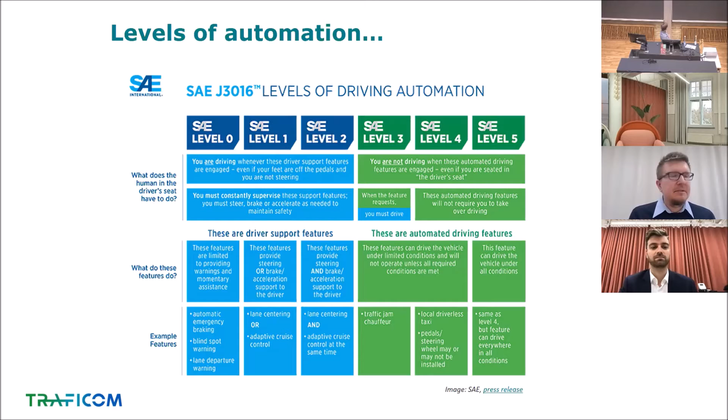A couple of words on the levels of automation. The typically used terminology talks about SAE levels of automation, from 0 to 5. One note: level 3 automation is something where the driver is still expected to act as the backup to the vehicle. When you talk about urban applications, you typically talk about level 4 type of things, when you talk about shuttles, or maybe other things.

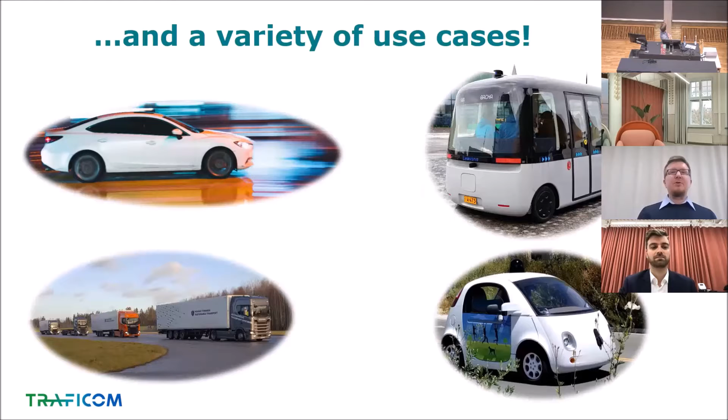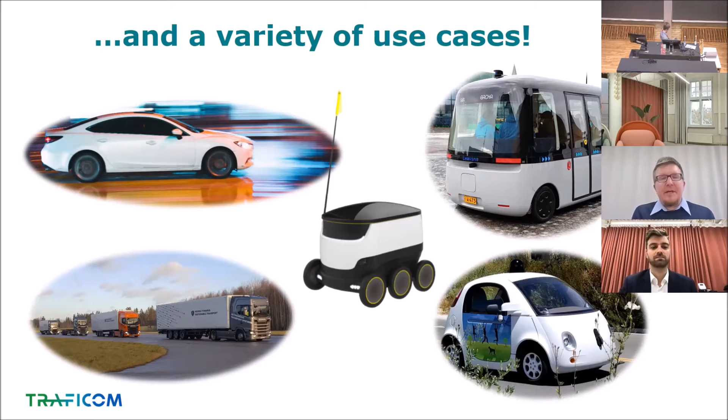I'll probably skip this one, but I'll go to the use cases. When we talk about urban applications for automated driving, you have different types of shuttles, then an aim towards a robotaxi type of service, and new additions like small sized delivery vehicles used to deliver goods and packages. The applications for these types of vehicles are still being tried out, and it remains to be seen how and when they will be used.

If you want to know where we are on automated driving on the technology front, just last week Waymo, the company considered to be at the top of technological development on automation, especially for robotaxi type service in a specific area, opened up their driverless taxi service, using regular cars fitted with Waymo technology, now opened to the general public in one area of Phoenix.

In Phoenix, Waymo has been testing for 4 or 5 years with a closed test going on there, driving tens of millions of miles in different parts of the United States, acquiring experience for their product and technology, and now they're ready to open it up to the general public in the Chandler suburb.

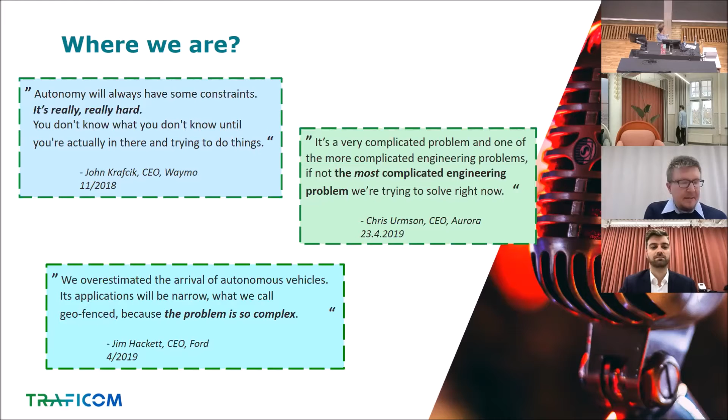Ford, also among the leaders, talks about how earlier there was an overestimation of how quickly autonomous vehicles would arrive. In limited, geofenced settings, you can address the issue because the problem is complex. One of the leaders, now at another company, talks about automated driving being one of the most complicated engineering problems being solved right now, and I think this is quite fitting for where the development is.

So why is it difficult?

Because it's about a vehicle that moves among regular traffic, among people, bikes, other vehicles, for full automation it would need to be able to do all the things that a human driver does when making decisions when moving a vehicle in traffic. So it needs to sense, then it needs to think about what the situation is, what is around the vehicle.

You need to do this very accurately to have a good picture of the surroundings. Then the vehicle and the system needs to be able to predict what each object around it will do next, and then it needs to plan what the vehicle needs to do itself. So do I continue on this path? Do I slow down? Do I accelerate? Do I turn a bit left, or do I turn a bit right?

And it needs to do this constantly, every tenths, hundredths of a second. And this is repeated, and this maybe paints the picture. That's the middle part - thinking, predicting, planning - that's done via software and different types of artificial intelligence or machine learning applications, if you talk about image recognition, for example.

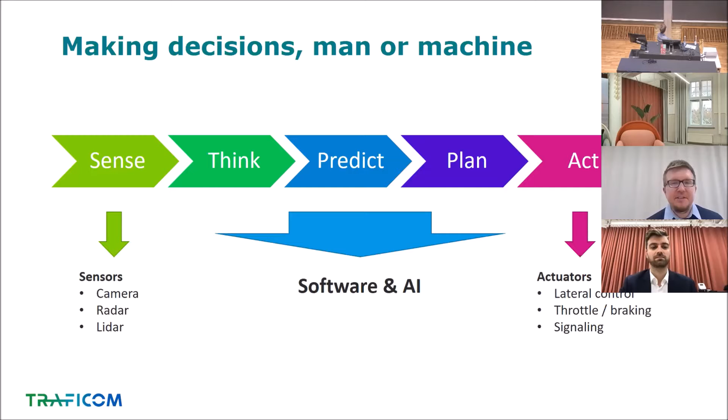And then they need to classify them, and then they need to predict what they'll do. So are they people, are they something that should be avoided, or is it something that you can just kind of go on? And the information you get from cameras, other sensors, it's never complete. The quality of the data is something, and it's not 100% at any time. And when you combine data that's of different quality, if you just look at it from a statistical point of view, you know that the sum of the parts is even more inaccurate than the original data.

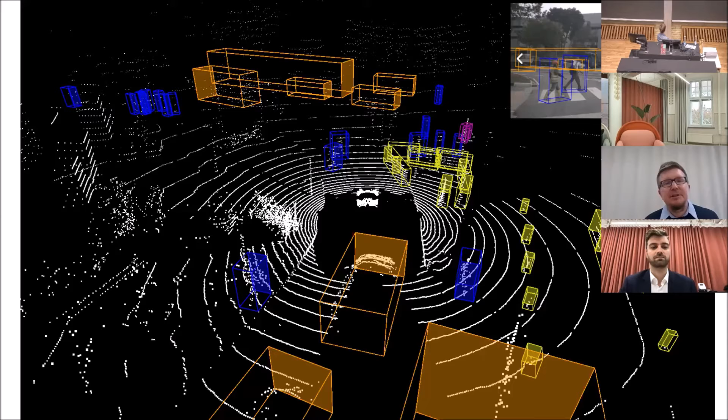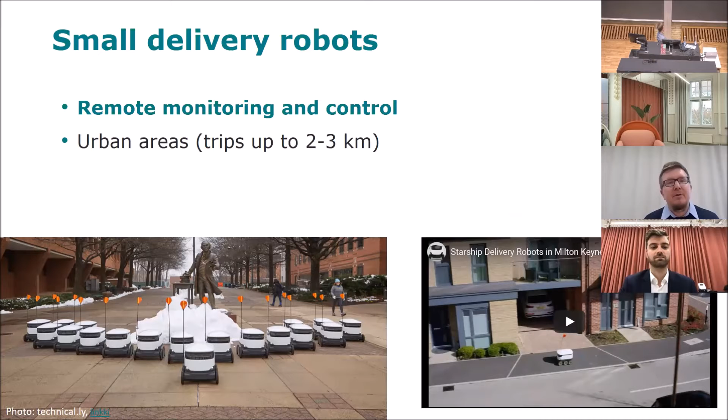Okay, but what's coming up or being tested? I mentioned the small delivery robots that are pictured here, where the use case is that you could use it in an urban setting for short trips, maybe a kilometer, 2, 3 - not maybe in a huge metropolis, but in a semi-urban, suburban area, or then a quieter urban environment.

And in general, different types of remote monitoring solutions, whether it's the shuttles that have been tested in Finland and around the world for transporting people, whether it's goods delivery on a small scale, medium scale, or the full truck size scale that Einride is trying to do and accomplish. But the basic solution here is an automated vehicle and then remote monitoring for it.

So in problematic situations, there's a control center that can intervene and give guidance to the vehicle - not so much as having active remote control, so someone constantly driving the vehicle remotely. This is not something that's currently seen as really that feasible. So the vehicle will have to be able to navigate on its own and get along on its own for the most part, and then in problematic situations, the control center could intervene.

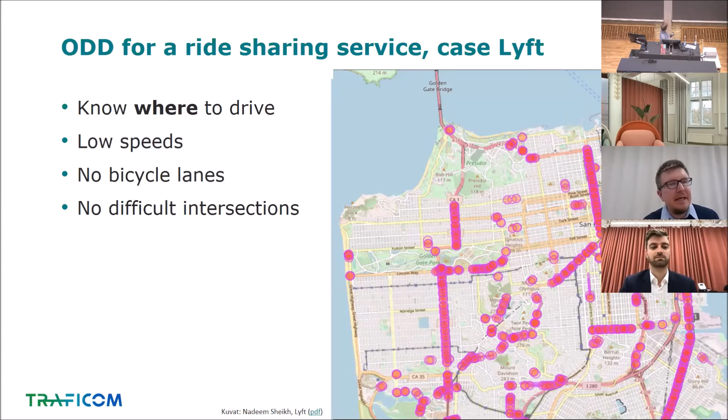Then there are difficult intersections - if you have left turns across oncoming traffic, these should be eliminated if possible. From there you'd define the routes that the ride-sharing or taxi service could operate. From a user standpoint, if you order a robotaxi type vehicle, you might not get it exactly where you want, so you might need to walk a block or two, but in most cases that wouldn't be an issue. At least this is the thinking behind the Lyft case.

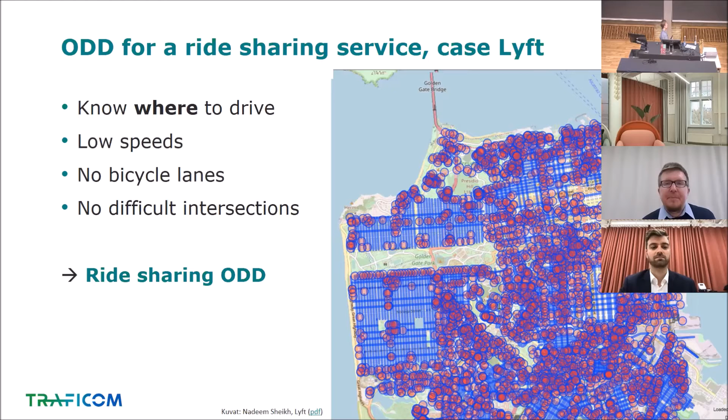They're also opening up the business logic on what happens if you don't have the driver there, because right now, whether it's Uber, Lyft, or other ride-sharing services, the driver is responsible for the costs of the vehicle, and the company just pays commission to the driver. If you don't have the driver, there's no owner of the vehicle except the ride-sharing company, so the whole setup changes. The company would own the fleet and need to manage it - right now they don't do any fleet management because drivers use their own vehicles. So the situation changes quite a lot.

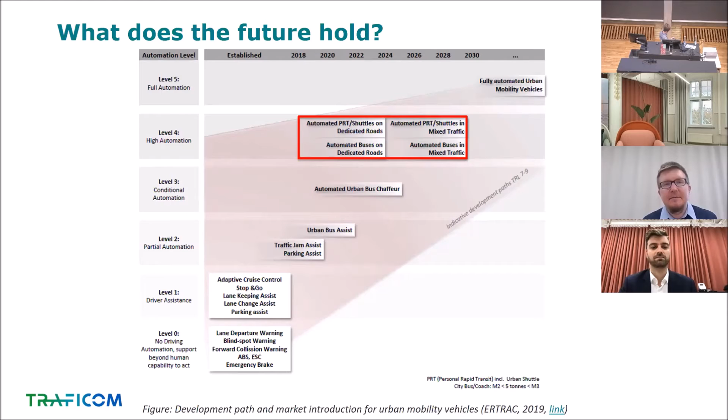So how does the future look in current estimates? This is from last year, from the ERTRAC Automated Transport Roadmap, showing the estimated development path and market introduction for urban mobility vehicles - shuttle types, city buses, or coaches that would be level 4 automation, working on some routes in some areas in some conditions. The window was quite large last year, from 2018 when the first products were on the market, to 2030, which is 10 years from now. There's no specific estimate beyond that.

When talking about what's important when moving forward with automation, trying to get the benefits from it rather than looking at it as a goal in itself - last week the Finnish Ministry of Transport and Communications hosted a high-level meeting on connected and automated driving, where the three main pillars of development are human centricity, enhanced data sharing, and working on the regulatory framework. This means taking the needs of humans and people who move around as the starting point in advancing different solutions - what works for people, what works for cities?

Also working on the transparency of the technology, so people understand how it works, what it does, what it doesn't do, and addressing issues related to data sharing, both between countries on experiences gained, and working on acceptance of new technology, not forgetting the importance of advancing the regulatory framework.

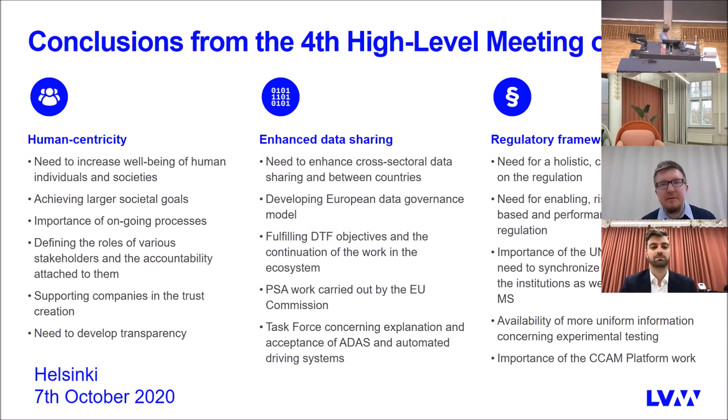It's often stated that regulation is or has been the barrier for trying out automation, but developments on this front have actually been quite quick, also in relation to the international conventions on road traffic, which are the agreements stating the basic principles that each nation then implements in their own national legislation. The international framework is already strongly moving in the direction where an automated driving system can, for some time, take on the role of the human driver. The regulatory framework is moving, and new systems, when developed, are examined in the UNECE, with requirements for testing and validating them being worked on.

This might be too specific, but another topic related to automation and connectivity is the role of the vehicle as a sensor, which will be much more important in the future - getting data on congestion, traffic conditions, accidents, weather, and road conditions, whether automatic or user-generated information. This is something a lot of work is being done on in Europe especially, and vehicle fleets in countries are every year more and more able to send and receive information from other vehicles or from traffic management systems.

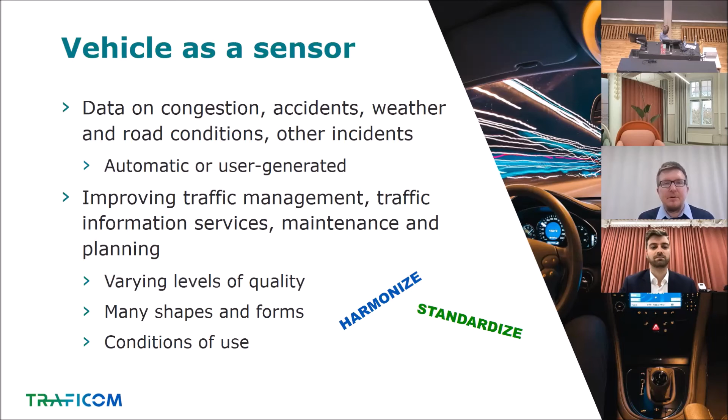This may be a bit specific, but what does the current state mean for the future? The impacts of automated driving are at this point a bit hard to quantify because it impacts on everything - on mobility, safety, efficiency, emissions, and land use - but it depends on which way the development takes. Will it focus on improving individual mobility, which could lead to more vehicles, more vehicle miles traveled, and more emissions?

Or will the future look more like using automation as part of public shared transport, where you have improved mobility options, better accessibility, also for new user groups, and land use benefits - you need less space for parking, less emissions, and a more efficient transport system.

The things that can be said quite certainly right now - a lot is unsure, but there will be challenges around people using the technology, whether in their personal cars or otherwise, or interacting with automated vehicles at some point in traffic, because the systems are different and have different limitations. So it's really important to increase people's understanding and awareness of what systems are, what they do, and to be transparent about how the systems make decisions about moving among traffic and people.

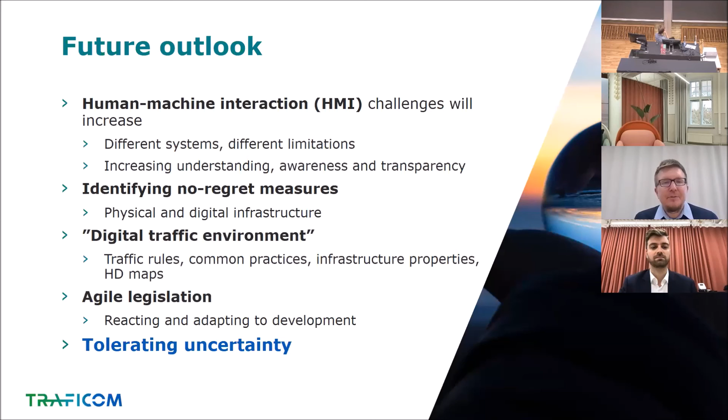We need to tolerate a bit of uncertainty going forward, and we want to avoid a future where things are sold on false pretenses, or create misunderstanding among users - so that if something's called one thing, it doesn't mean it always does the things you would expect it to do. This speaks to increasing people's awareness of what the technology does, what it doesn't do, and being open about the challenges that are still present.